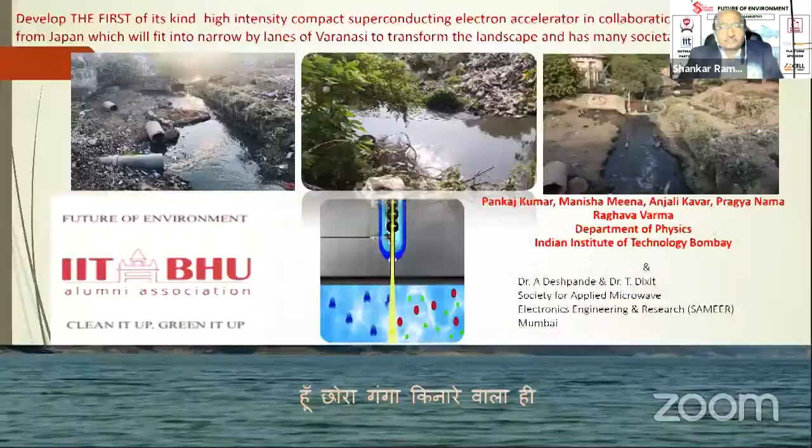So I'm very thankful to the Alumni Association IIT BHU for giving me this chance to present something which I have been interested in for the last decade. And I would be presenting it on behalf of my students who have done most of the work: Pankaj Kumar, Manisha Meena, Anjali Kavar, and Pragya Nama.

And though I'm from Bombay, मैं हूँ essentially छोरा गंगा किनारे वाला ही. So

this idea was to use the international goodwill and expertise that I have developed over the last 35 years for the benefit of our nation. And the seed for this idea came from the International Linear Collider, which Japan wants to build with the aid of the world scientific community. ILC is a sequel to the Large Hadron Collider, which you may have heard is in CERN, Geneva, and which

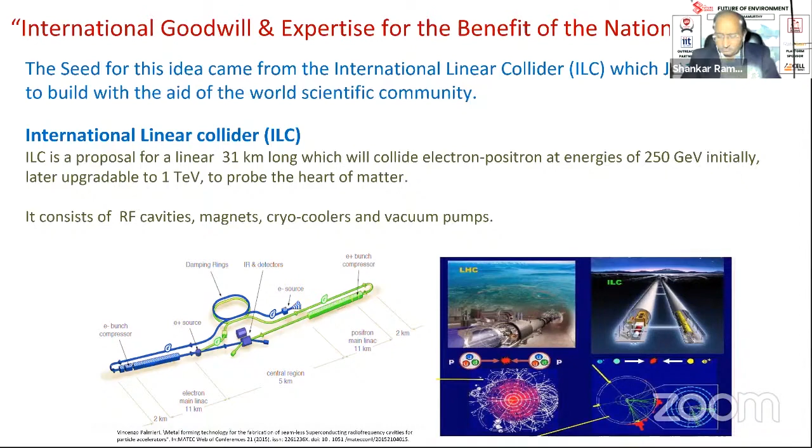discovered the Higgs boson. So ILC is a 31-kilometer long accelerator which will collide electrons and positrons, initially at an energy of 250 GeV and later upgradable to 1 tera electron volt, to probe the heart of matter. For our purpose, it consists of RF cavities, radio frequency cavities, magnets, cryocoolers, and vacuum pumps. The idea is that we can study the properties of the Higgs boson, which was discovered at LHC, much better because you will be colliding two elementary particles, electron and positron, instead of composite particles, the protons at LHC.

So the heart of the system is the radio frequency cavity, the key element of an accelerator, which stores electromagnetic energy and imparts it to the charged particles. There are two kinds of cavities, normal and superconducting. The ILC foresees around 20,000 superconducting 9-cell cavities, as shown here in the figure, and they can increase the energy of the electron by 34 million volts in 1 meter of length.

And all the points that I mentioned are very important for the application that we have in mind. They have been widely tested for stable running for more than a decade. The Japanese have perfected the art. They are very compact and very energy efficient. And these cavities have been optimized for heat losses and also for wall-to-accelerator power, because the accelerator has to run round the clock, round the year, for several years.

So all these things have been optimized, and this would be very essential for the application that we have in mind, which I quote below. Use a similar cavity in length and similar dimension in phi, and make a superconducting high-intensity accelerator which can accelerate electrons up to 1 to 2 MeV to treat the effluents flowing into our rivers. So the system becomes very compact, which I come to.

And broadly speaking, in the emerging class of this thing, there are 3 types of advanced treatment processes. One can guess also, we are all engineers and scientists, that you could oxidize the biodegradable waste, you could reduce them, and the emerging class are now advanced oxidation reduction processes, which I talk about further. In this, X-rays could be used, ultraviolet rays, gamma rays, and electron beams. So the first one has only an oxidizing agent, which is hydroxyl radicals. The second one has hydrogen atoms in nascent form, or hydrogen radicals, and the third one has both of them.

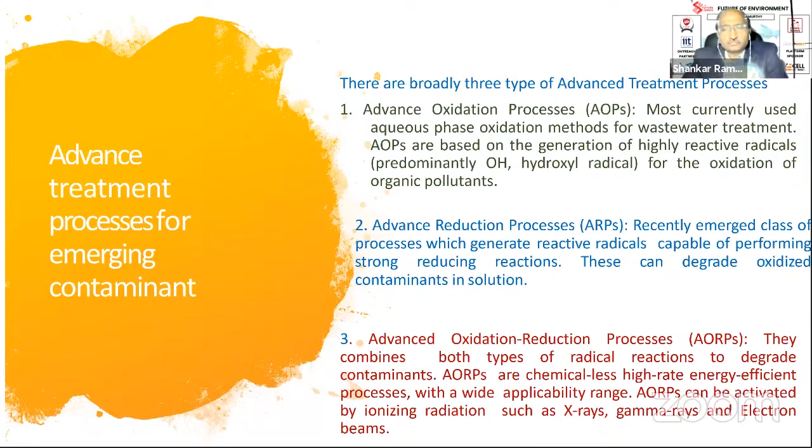In any chemical, you can either have an oxidizing agent or a reducing agent. Only in advanced oxidation reduction processes, which are based on ionizing the water, will you have both oxidizing and reducing agents, and hence it's common sense that they would work better than the first two.

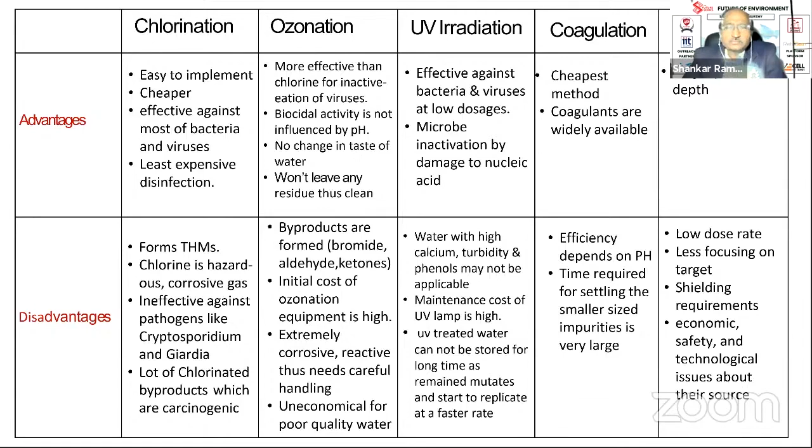So let's talk of these AORP, or advanced oxidation reduction processes. Ionizing radiation is an electromagnetic wave with a frequency higher than 10^17 hertz or energy greater than a few electron volts, so that the water can be ionized. It can be excited or it can be ionized. The excited water gives you hydrogen radicals and hydroxyl radicals. The ionized gives you, again, hydroxyl radicals and aqueous electrons, as we call hydrated electrons.

So hydrated electrons and hydrogen atoms serve as reducing agents, and hydroxyl radicals and hydrogen peroxide, which is formed after the combination, act as oxidizing agents. So the G value determines how many such radicals would be produced, whether you use a chemical or radiation. And normally it is seen that the G values for these advanced oxidation reduction processes are much greater than for the conventional oxidation processes. So they'll be more effective.

So why an electron beam accelerator? First of all, it's an eco-friendly technology. There is no secondary waste generation. We don't need any catalyst or heating. It is compact, reliable, energy efficient, and you can switch it on and off as you wish. You can also use this to eliminate the need for chemicals such as chlorine. As I said, it is chemical-less, so that is much better.

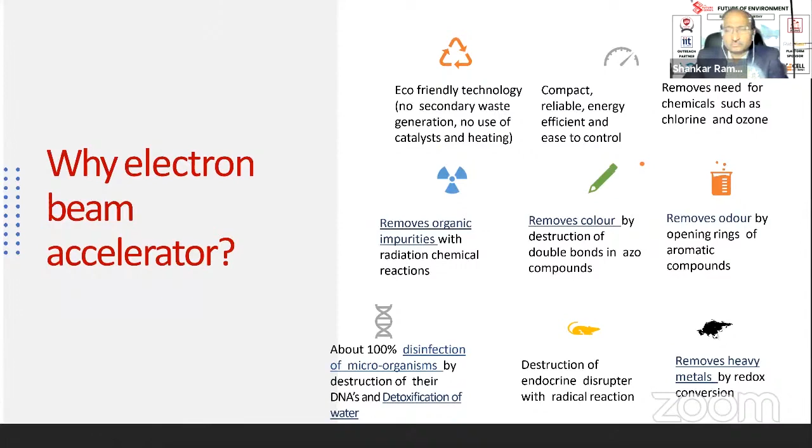It removes organic impurities with radiation chemical reactions. It removes color by destruction of double bonds in azo compounds. It removes odor by opening rings in aromatic compounds. In E. coli, the DNA is destroyed, so there is no question of it mutating. Nearly 100% destruction has been found, and endocrine disruptors are removed. It removes metals by redox conversion, so they take a metallic form, settle down, and you can sedimentate them. I again won't go into the details. This is a very busy slide, and there's just no time.

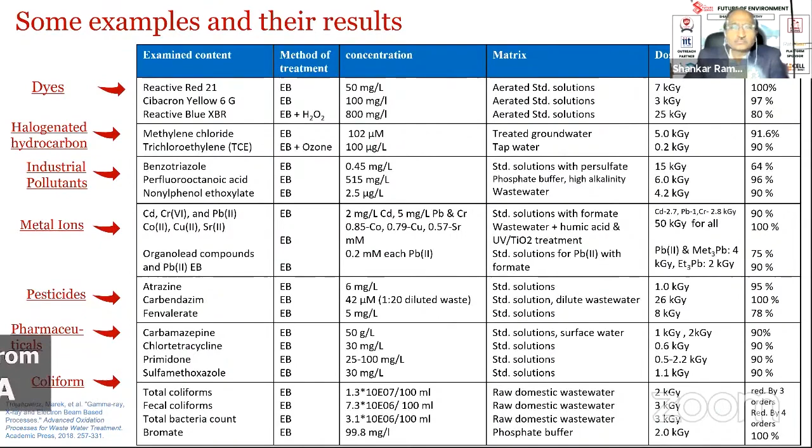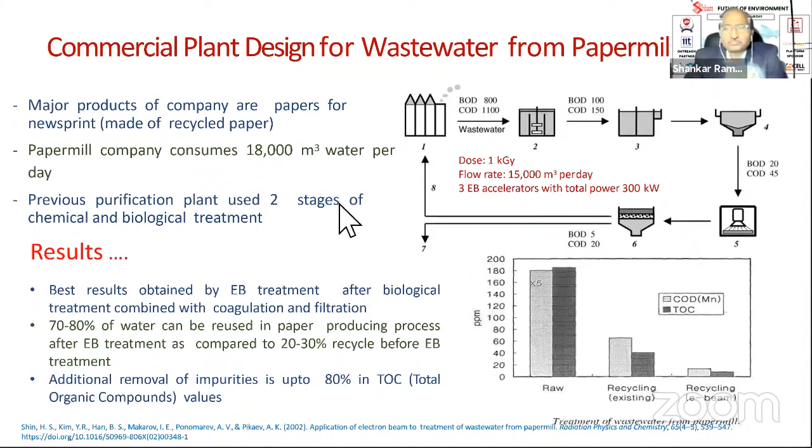With a flow rate of 15,000 cubic meters per day, they had to put 3 electron beam accelerators, a total power of 300 kilowatts, but they could recycle 70 to 80% of the water, making the process very green. And the additional removal of impurities was up to 80% in total organic compounds.

The next slide shows that you can have your cake and eat it too, because they claim that the investment will be returned in 5 years. So all the cost of constructing it, which includes the cost of the equipment and the cost of running, they could get back in just 5 years, and you get much better quality water. You can circulate much more. The paper is from a reference, so I don't need to go further on it.

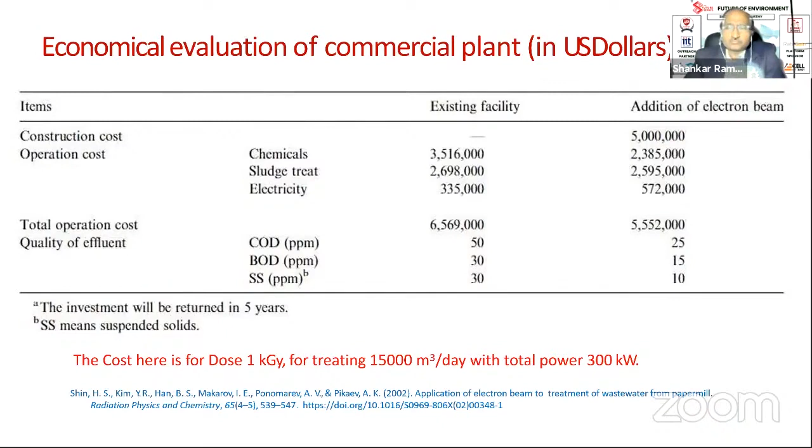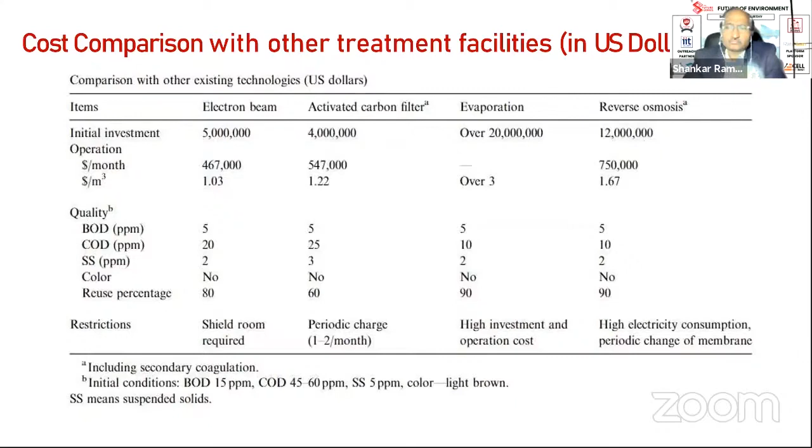This is just a cost comparison with other treatment facilities, and this is with normal conducting electron accelerators. Now we are talking of superconducting. So this is again a study which has been done, and if you look, the cost of electron beam is the lowest per cubic meter, and the BOD and COD removal is comparable, as is the cost. But if you combine it with another conventional process, normally it has been seen that one can get much better results.

So there are worldwide water treatment plants with electron beams, and there are so many of them I saw over the years. The first study started in the US and then it has spread, but it has not spread very fast. Why? Because these normal conducting accelerators become very large. You need very high power to make it economically viable, so the size becomes large, and when you make the size large, the reliability suffers.

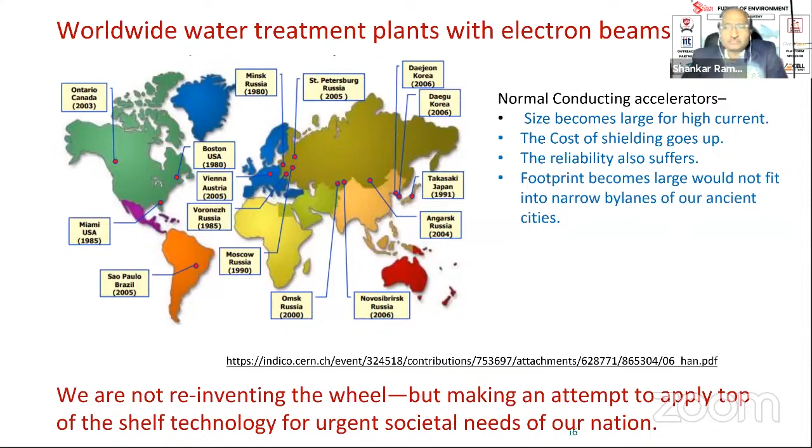So I am not making any claim that I am reinventing the wheel. But I saw a problem in the country, so we are making an attempt to use off-the-shelf technology for urgent societal needs of our nation. So this is our conceptual prototype of a purification system. This is the way you design this superconducting cavity, which has already been done at IIT Bombay. The fabrication, we don't have such facilities.

Normally for superconducting cavities, because they have been optimized for heat losses, the total heat budget that they quote is about 4 to 6 watts. Commercially, you have cryocoolers available at 2 watts, now 4 watts, and now even 8 watts. So with the turn of a switch we can run it, because if we had to use liquid helium, this would not have made much sense, since the footprint would have become larger.

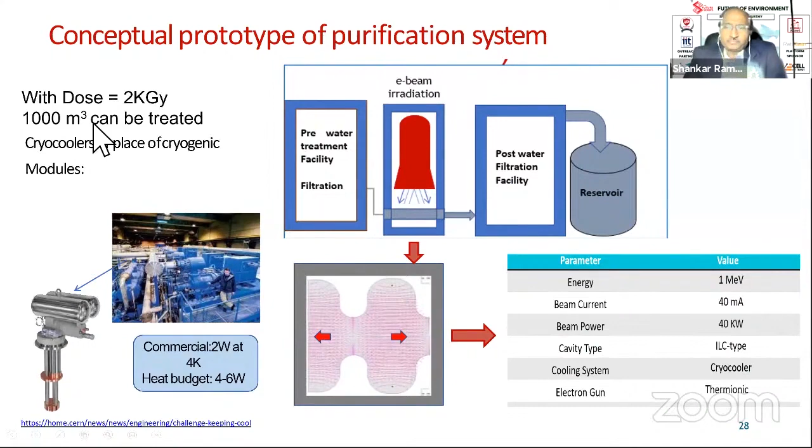So you first pre-treat the water, then you irradiate, and then you filter it out, or post-treat, and then you can allow it to flow. We have estimated that we can get about 2 kilogray, so 1 MLD can be treated very easily. For the economics, there are 2 factors: reduce the required doses.

These experiments we are doing at present, and this is for which we have also invited Dr. Ramurthy, is to optimize the dose by combining it with conventional treatment, so that you can work with a lesser dose, and you improve the efficiency by going to superconducting.

So higher efficiency, up to 80% you can get from wall to accelerator power, which results in low cost, high current, high power, more water can be treated. Again, low cost, typical area occupied would be a few meters square, low footprint, again, saving in cost.

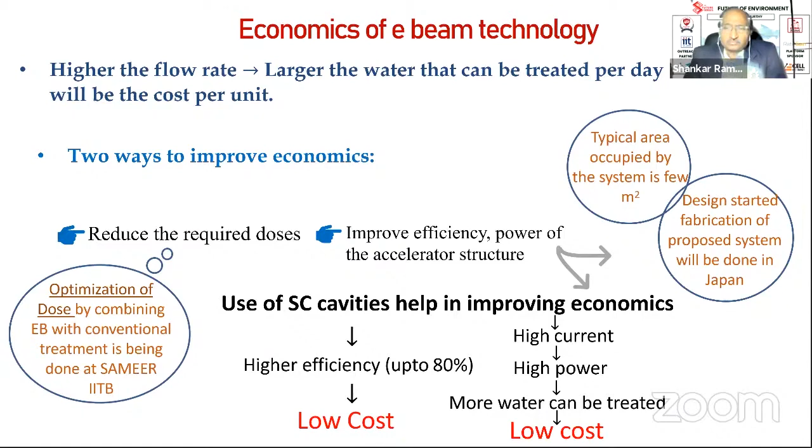So the milestones reached so far. This work is a part of a project that has been submitted on our behalf by the Government of India to the Government of Japan under the Science and Technology Research Partnership for Sustainable Development. This is a scheme of the Government of Japan. Under this scheme, the scientists in Japan have also submitted a similar proposal to Japan Science and Technology, agreeing thereby that they will work with us on this project.

The project will now be evaluated by Japan Science and Technology, and if approved, would be funded fully by the government of Japan. It funds only 10 projects worldwide in a year. We had submitted it last year. There was some lacuna there about a social agency not being part of it, so they had asked us to come again. Now National Mission for Clean Ganga is a part of the proposal and has agreed to put the pilot plant. They have been very kind, at Assi Ghat.

SAMEER, which is housed at IIT Bombay, IIT BHU, and Department of Physics BHU are also a part of this proposal. We have already designed the cavity at Mumbai, as I showed in the figure earlier. Fabrication would be done in Japan with our collaboration. We should be able to treat about 1 million liters of water per day. As Assi has a much larger flow, we would be treating only a part of it, so we will have to divert it. National Mission for Clean Ganga has agreed to help us in this and take necessary permission.

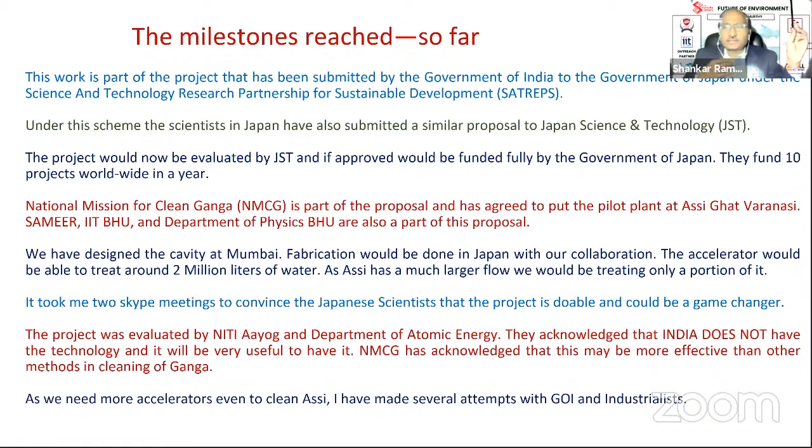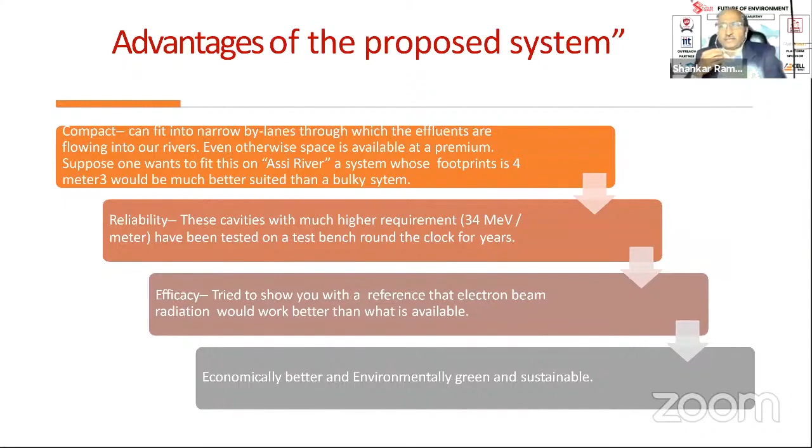I have made several attempts with Government of India and industrialists. I'm hoping that some day I will succeed. So advantages, just summarizing: it is compact, so it can fit into narrow lanes. Reliability: these cavities, with a much higher requirement, 34 million volts per meter, have been tested on a test bench round the clock for years. It's very efficient, and economically and environmentally, it's green and sustainable. There are other applications.